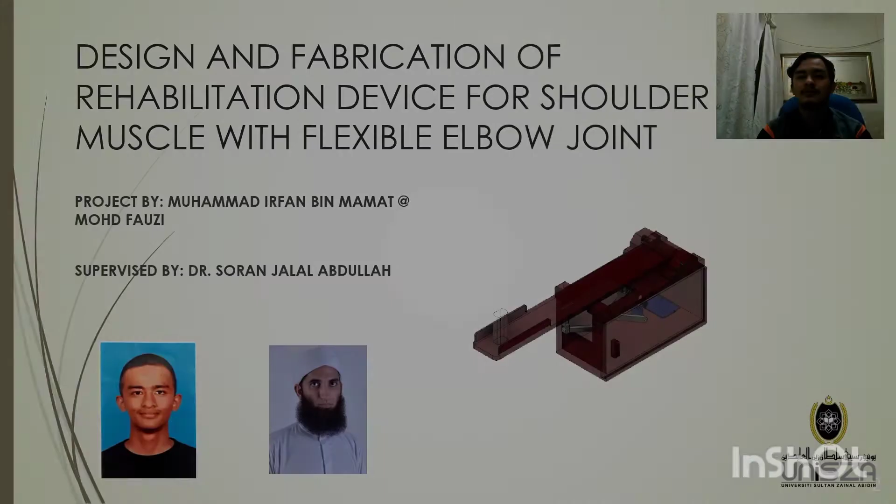What is rehabilitation? Rehabilitation is an action of helping someone to restore their health or normal life through a set of training and therapy, after imprisonment, addiction, or illness. There are many rehabilitation activities that can be carried out to restore one's health, usually supported by specific equipment. Nowadays, there are plenty of advanced rehabilitation devices that can be found at rehabilitation centers or even in the market.

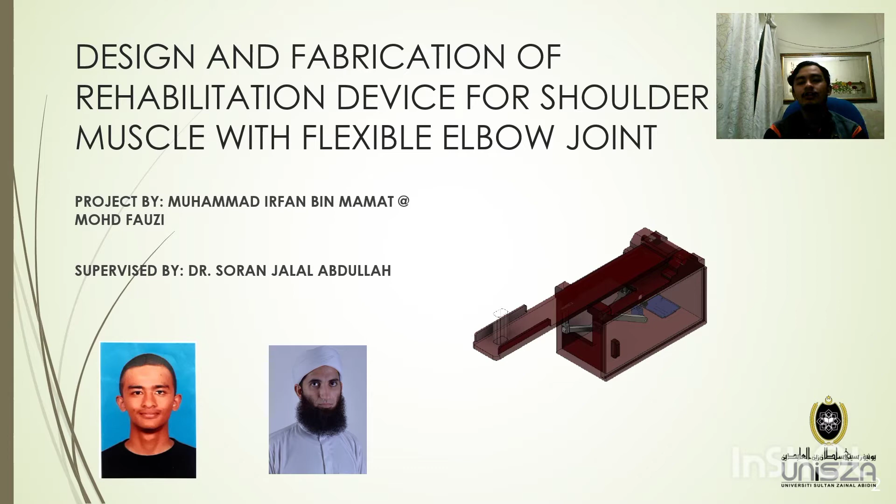Problem statement: there are several issues regarding rehabilitation devices. The first is that the device itself is quite expensive, especially ones using modern and advanced technology. These devices contain many complex components such as electric actuators and hydraulic actuators that make the device expensive, with the price able to go up to thousands of dollars.

Aside from the price of the rehabilitation device itself, the maintenance cost for the device to operate properly is also high.

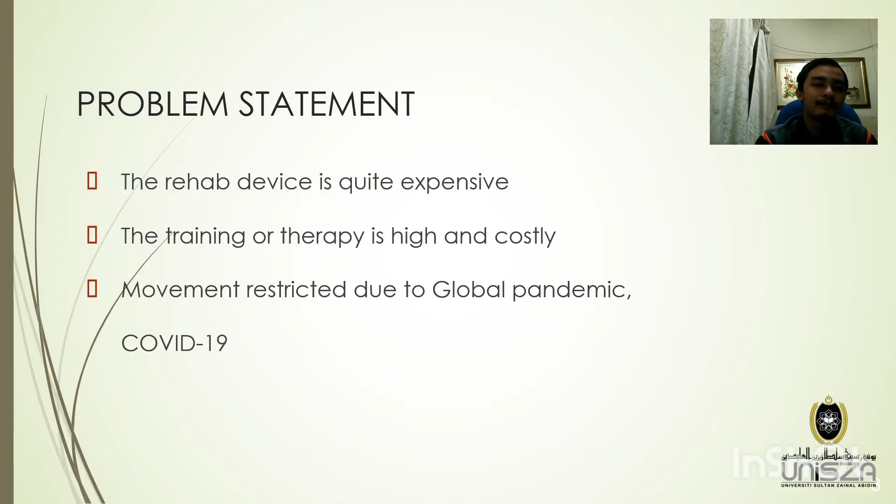The objectives of the project are: first, to study the existing rehabilitation device for shoulder muscle with flexible elbow joint; second, to design and fabricate a low-cost rehabilitation device for shoulder muscle; and last, to validate the functionality of the low-cost rehabilitation device for shoulder muscle.

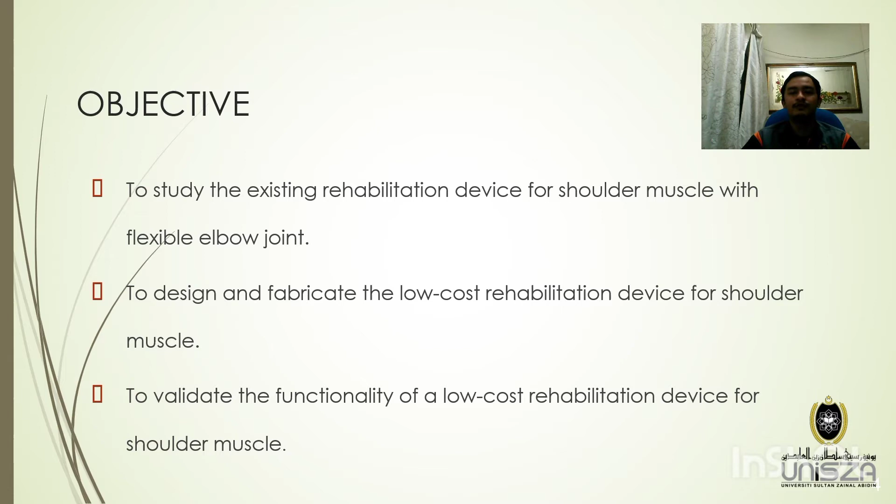Usefulness and application: my project is to develop a low-cost rehabilitative device that can be used for the upper limb, especially the shoulder muscle. This device will be developed locally, therefore it is highly anticipated to be present within the domestic market.

Novelty and inventiveness: my project is more about inventiveness. The rehab device is light and portable, so it can be used anywhere and anytime. It is also cheap and affordable, so anyone can buy it and use it at home.

Next, the product system development. Project selection is a process to assess project ideas and select the project with the highest priority. The selection is often made based on a questionnaire survey and discussion with the supervisor. At this stage, three sketches were made to understand the concept of the product through basic elements, both visual and conceptual. This also includes the process of innovating the concept before bringing it to the next stage.

Out of the three sketches, this is the selected idea concept. The selection is based not only on the questionnaire survey, but also on studying the characteristics and features that can be applied in the project.

This concept is an improvement from the existing product, focusing on the low-cost materials used during the project fabrication.

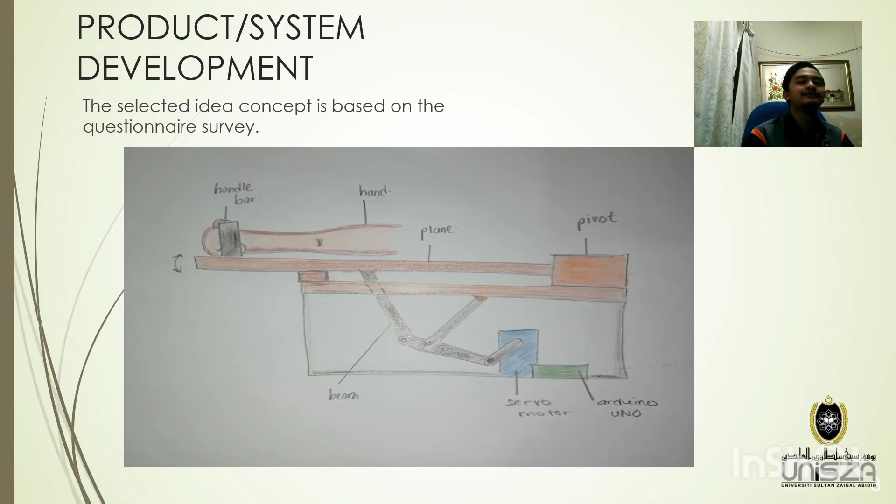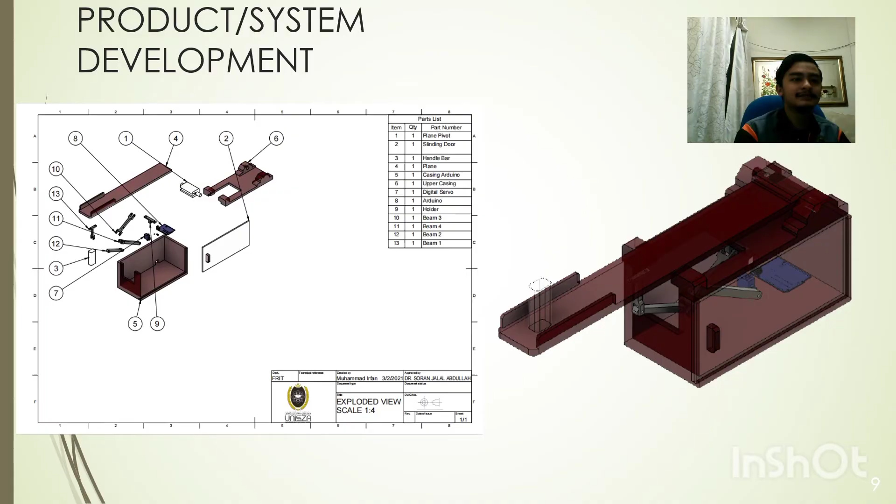After sketching and selecting the idea, we move to Fusion 360 to make a technical drawing and 3D model. This ensures all measurements in the technical drawing are equivalent to the actual product size. There are several processes during project fabrication, such as measuring, joining, cutting, and grinding.

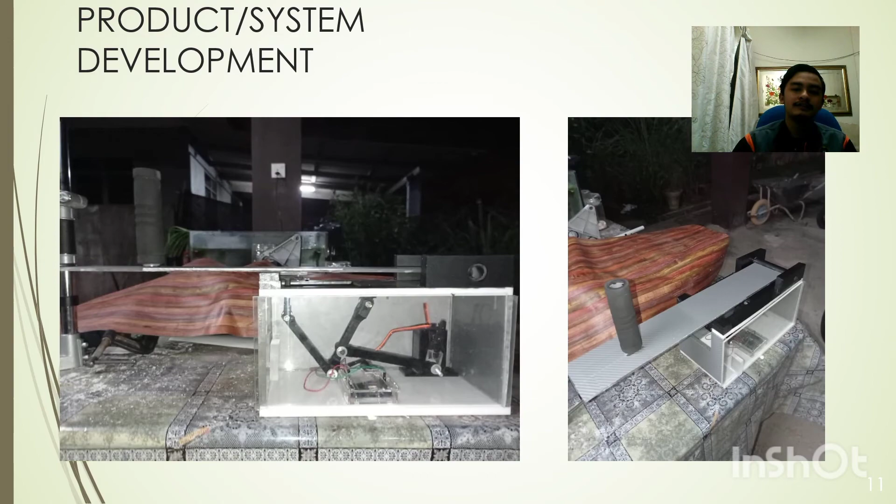After going through all those fabrication processes, these are the finished products of the rehabilitation device for shoulder muscle. In this section on product system functionality, we will see how the rehab device functions and how to use it.

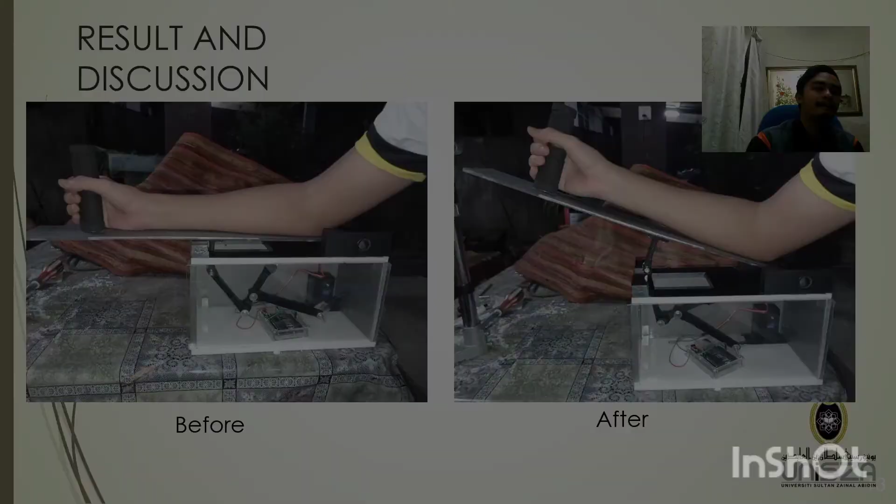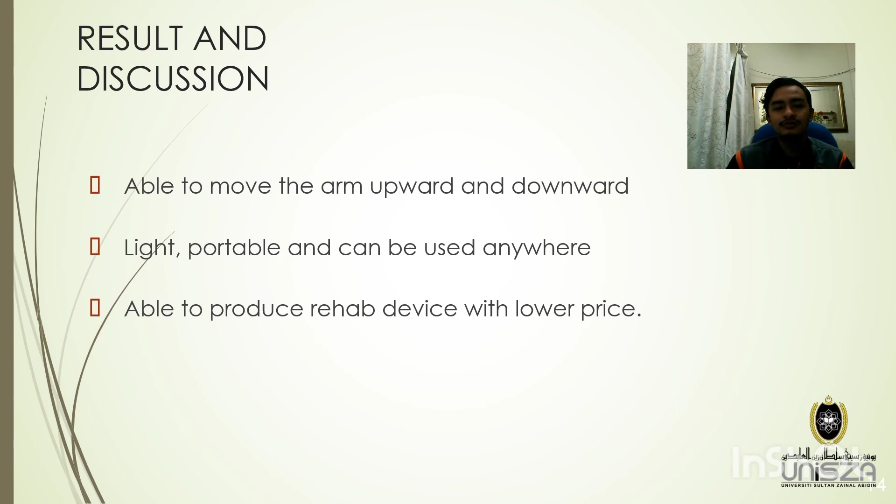Result and discussion: as you can see in this picture, there is a difference between before and after the switch is turned on. This device is able to move the arm upward and downward. The device is light, portable, and can be used anywhere. We are able to produce a rehab device with a lower price.

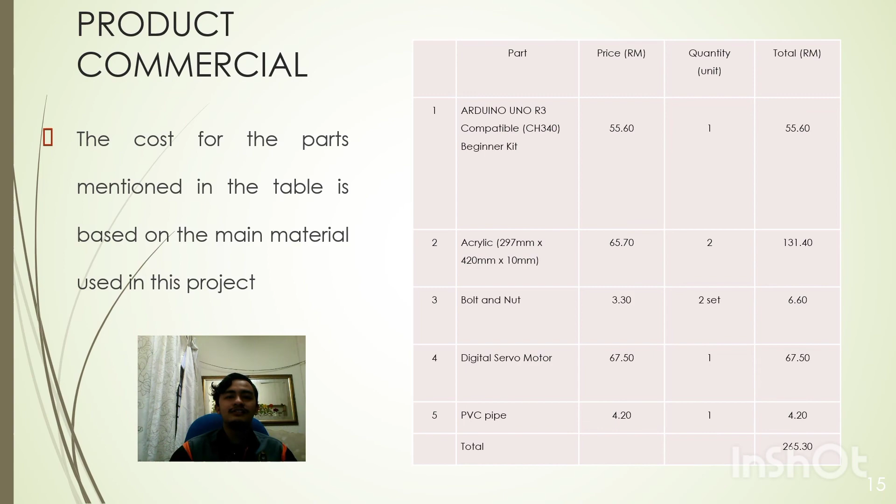Product commercial: the cost for the parts mentioned in the table is based on the main materials used in this project. The total cost for this project is 265 ringgit and 30 cents. The body structure of the device is made from acrylic material, and the product system is a combination of mechanical and Arduino systems.

The product size is 350 by 150 by 170 millimeters. The product lifespan is over 10 years of performance. The price for commercial purposes is 320 ringgit Malaysia.